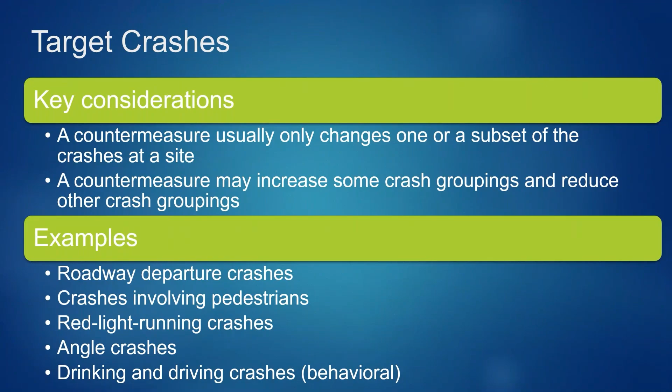Now, selecting a countermeasure, we want to look at a number of factors. First of all, cost effectiveness, because I know last time a number of you indicated that you have a desire to do all of the necessary things to improve safety, but you can't afford to do everything. So we want to come up with some ways that we can really get the most bang for our buck and to reduce those fatalities and serious injuries as much as possible within our budget. So that has to be within the context.

And so you might think about your facilities. Do you have a high-speed facility with limited access? Are you focused more on rural town centers that have a lot of vulnerable users, which would be pedestrians and bikes? Maybe it's a suburban arterial with driveway accesses that causes the most problem. Maybe you have more of an urban central business district type of setting. So the setting that you're in obviously is going to have a big impact on the types of countermeasures that you will select.

Now, when you're selecting those, we definitely want to consider what is the anticipated impact on crashes. We want that reduction to be as large as possible. And then think also about the differences in frequency and severity. There may be locations that have frequent crashes, but they're not that serious. A small fender bender is something that, of course, we want to address, but it might be better for us to really focus on where we have a more serious type of injury or fatalities occurring. So thinking through what exactly do you want to address? Is it the fatality and serious injuries? Are you trying to target all crashes? Can we target all crashes, or do we need to kind of separate that and do what we can?

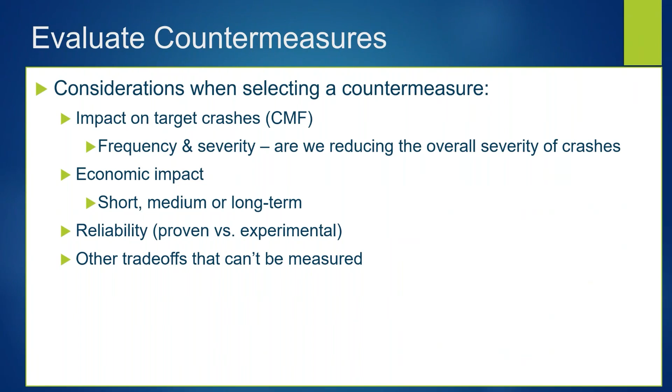Now, Federal Highways has a list of proven safety countermeasures. They started with 9 or so a number of years ago, and they continually added to this list as new countermeasures have been implemented and studies have been done on those. So they've kind of proven their worth and put into context what situations that they're beneficial in. And so Federal Highways does have a page on their website, and they split this out into certain countermeasures that are most appropriate for different types of crashes.

One of the most important ones that we see a lot in rural states is roadway departure or run off the road crashes. And so we'll see some details on enhanced delineation, rumble strips, median barriers, some roadside design ideas, with clear zones and such, safety edge, wider edge lines, and that type of thing.

When we consider intersections, there could be things like backplates with the retroreflective borders, corridor access management, dedicated left and right turn lanes, reduced left turn conflict intersections, roundabouts, that's a big one, yellow change intervals. So lots of things that can be done. And this is a great resource to go to and just look at the ideas.

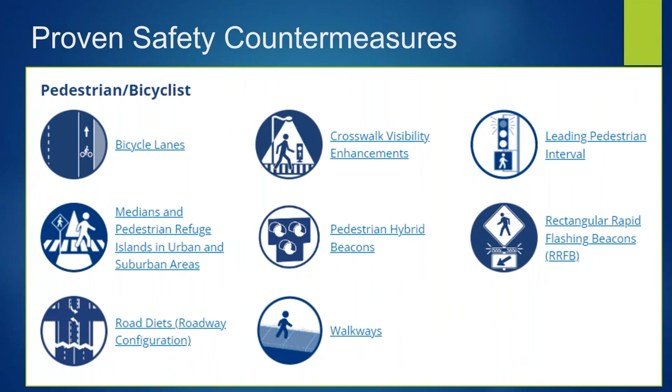It's a bigger toolbox. So not every tool works in every situation, but the more tools we have access to, the more we can make those decisions. And they have a list for pedestrians and bicycles, like bike lanes, visibility, pedestrian refuge islands, walkways, hybrid beacons, and so on. And then there are some that really are cross-cutting, and they are applicable to a number of situations, like lighting, local road safety plans, friction management, safety audits, and then speed management.

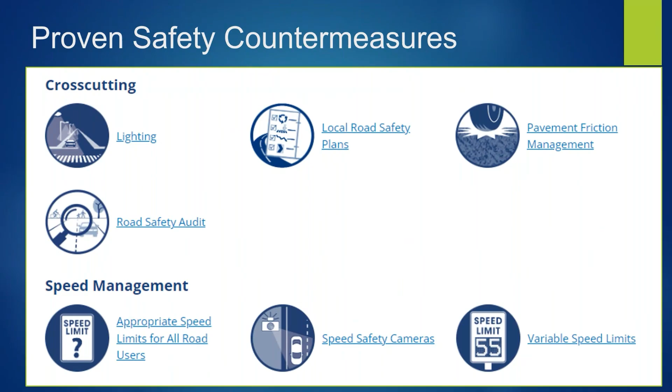That's kind of a big one because we do know that speeding certainly can cause accidents, and in those accidents, the higher speeds tend to result in more serious injuries. Now, in Arkansas, we have a big issue with roadway departure. That's one of our focus areas.

And 74% of fatalities there are kind of broken down into different categories. Like, what else do we know about that? So taking the data, we see that 37% of those fatalities are young drivers, 63% are male drivers, 58% of those accidents happen during daylight, 25% have no seatbelt, 23% speeding. Almost half of those are on weekends. So I think that's very telling in the types of trips that are being made that are involved in these types of crashes. 35% happen during a morning or afternoon commute, and 14% are also at an intersection.

So since we know that that's a big deal, let's talk about some roadway departure strategies. So when a vehicle runs off the road, let's think, first of all, we want to keep that car on the road. So they need to navigate, they need to keep it between the lines. So our first goal will be to think of ways that we can keep the car tracking where it should be. So what safety countermeasures will help us with that? We can increase enforcement, do road safety audits and that type of thing.

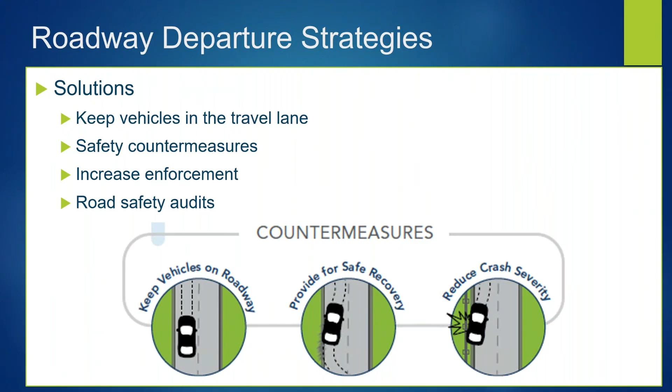But then if we cannot keep those cars on the roadway and they happen to go off on the edge or just slightly outside of that traveled way, can they recover and get back on the roadway? So that's a second strategy. And then if we cannot get them back on the roadway, then what can we do to reduce the severity of the crash? So that'll kind of be our focus in stages.

So roadway departure, nationally, about 51% of fatal crashes are run off the road. That's typically higher in rural states. 27% of those are head-ons, 25% rollover, 19% are trees, or you could put that in context of just a crash with a fixed object. 25% of those are at curves. So we see that that's kind of an overrepresented portion because a curve is a very small portion typically of the overall roadway.

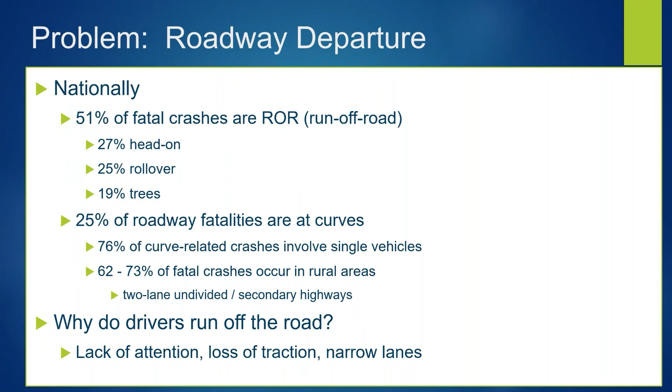76% of curve-related crashes involve single vehicles. So this is not necessarily an interaction with another vehicle, and that changes our perspective on how we think about these countermeasures. And then why do drivers run off the road? We got to kind of get into the mindset of what is causing this to happen. So if you see, of course, in rural areas, we have animals that run out onto the roadway, and that is not something that is an interaction with another vehicle, but certainly changes our attention, reaction times, decision-making skills, and a very short time frame to make those decisions. But drivers can run off the road just from not paying attention, loss of traction, narrow lanes. So we've got a lot of different things that we can pinpoint to try to make this better.

Now, if I know that curves are part of the problem, what if I could take curves out of the equation? Well, that's not realistic. We can't straighten out all the curves, but we might be able to make some changes to alignment. I know that some jurisdictions have a policy that in a horizontal curve having a smaller radius or sharper curve, so to speak, they actually require a little bit more roadway width so that vehicles have a little bit of forgiveness on tracking in that area. It's not really straightening the curve, but it does give you a little bit more roadway width to work with. So those wider lanes at just that sharpest part of the curve can help.

You can add super elevation, and these are things that might be done when you are doing maintenance on the roadway, repaving and that sort of thing. You can make some minor adjustments that will help along these lines. Another thing to look at is the quality of the pavement in those horizontal curves. Again, it is something where it's not just a straightaway, so you have to have that hand-eye coordination and track through there.

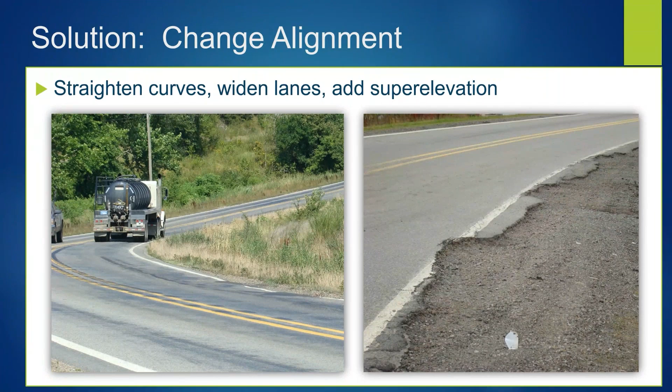So one of our solutions, of course, would be rumble strips or rumble stripes. And this is a series of indentations that are ground into the pavement edge. It creates noise, vibration, so that's something to get the driver's attention. So remember, our first goal was to keep the driver from running off the road in the first place, keep them in the lane. So as soon as they start to leave the lane, that pavement has something there to create that noise and vibration to alert them.

Hey, pay attention. And maybe it was that they looked away for a second. Maybe they're getting drowsy. Maybe they were looking in the rearview mirror at something different. Who knows? But this will get their attention and allow them to make that correction. A lot of the newer vehicles now also have lane assist, and it can vibrate the steering wheel or create a sound that tells you, hey, get back in the lane. So those are good things. But we're looking more at the roadway. What can we do as the roadway agency?

Now, those rumble strips can go at the shoulder. They can go in the center line. And sometimes we have rumble strips in the travel lane. Think about as you're maybe going downhill and coming to a stop sign that might catch drivers by surprise. If you have trouble with folks running a stop sign, you can put transverse rumble strips across the lane to get the driver's attention and alert them to slow down as they approach that stop sign.

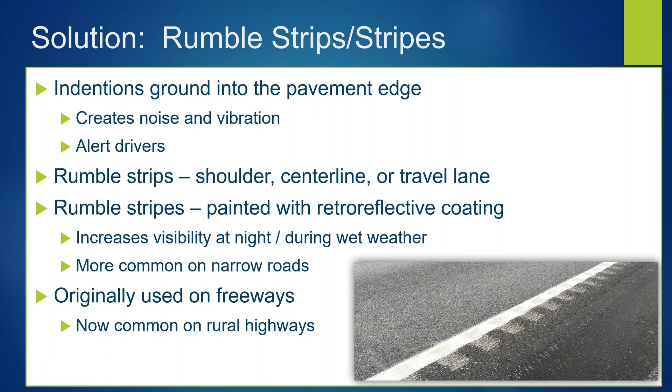Originally these rumble strips and stripes were used on freeways. So it was kind of implemented on the more national scale, the big roads, you might say. But seeing what those benefits are, they're now more common on rural highways, county roads, and other types of roadways.

Now, shoulder rumble strips can be constructed using a number of different methods. The most common is the milled, but they can also be rolled in, they could be raised, and they could be formed, like on a concrete pavement. Most of the time, well, 90+% of roadways in the country are asphalt. So of course, we're going to see these more commonly on asphalt roadways. Now, the milled is the most common because you can go in and form these after you've paved the road. It doesn't have to be done during construction. So it is a safety feature that can be added when the road is already in place.

The rolled type have to be done as the pavement is being placed, so that can only be done during an overlay type project or maybe new pavement construction. There are also the raised, or more of a bump instead of a dip. And that's something that you might see in a warmer climate.

We don't want to do that in the colder climates because when the plows go through to scrape snow off of the roadway, they can peel those off. But in a warmer climate, that can be helpful. Let's say you have a really heavy rainfall and there's so much water on the road that it's getting difficult to see the pavement markings, but you can feel those bumps. And if they are raised and have the reflector, then you might be able to see them a little bit before you hit them. So that's an advantage.

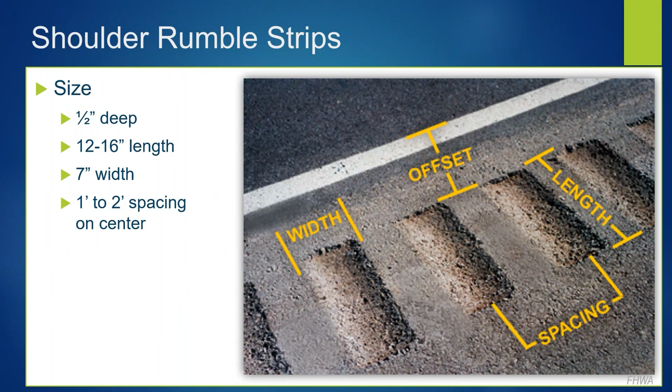Now, early on, there's an obvious benefit, but one of the concerns was if we start grinding into a new pavement surface, is that going to cause that portion of the pavement to deteriorate more quickly? And are we going to have other problems that really create issues that weren't intended? Looking nationally, a lot of the early research does say that there's no evidence of early pavement deterioration. I'm sure all of us can also look at cases and find some place where that's not totally true.

But one of the issues is that when we pave, we place the longitudinal joint at a lane line. A lot of times we do have a joint between the lane and the shoulder. If that is true, and if that joint was not constructed well, and we put rumble strips right on top of that joint, that definitely could be an issue.

Since we're putting depressions in the pavement, water runs downhill, it's going to collect in those low spots. We also know that water and pavements are not friends. So we don't want to have water just standing in those depressions for a long period of time. One idea was to place a fog seal so that after those areas are milled, you spray a fog seal over that to help make it more impermeable to any water damage that might happen. Overall, that was deemed not necessary and also not monetarily beneficial.

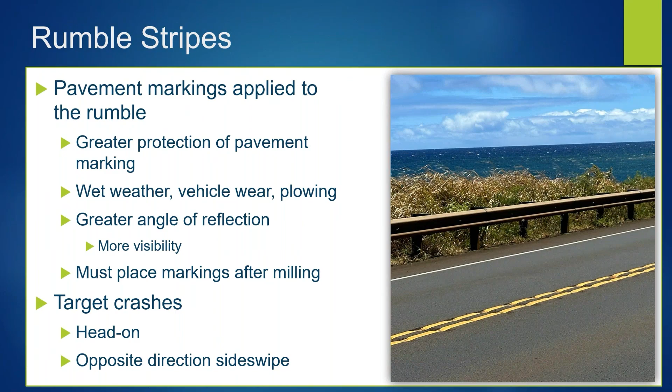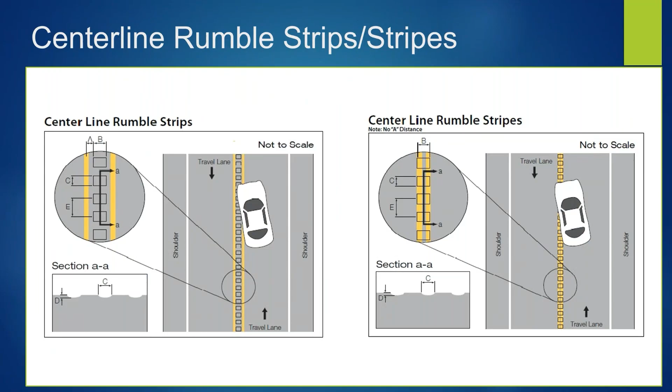Now, how successful is this? We're all pretty familiar with it, I think, but nationally, there's some pretty good evidence that there's a definite reduction for fatal and injury head-on and opposite direction sideswipe type crashes. For the shoulder rumble strips, roadway departure with fatal and injury crashes overall dropped about 36%. We would like it to drop a whole lot more, but that's pretty good. Centerline rumble strips in urban areas have reduced crashes about 64%, and rural areas 44%.

Michigan had a study that they did overall on roadway departure crashes. Their rumble strips and stripes dropped crash numbers 38%. And New York showed roadway departure crashes dropped by almost 80%, which is fantastic. And crossover crashes at the center line dropped about 57%. So those are definitely some convincing numbers that say this is worth the effort.

Now, things to consider. The purpose of rumble strips is to counteract driver error. It's not going to correct a deficiency with the roadway. So let's say that your curve is too sharp for the posted speed limit or the warning recommended speed, or you've got some issues with super elevation, or maybe some skid resistance issues. This is not going to fix that.

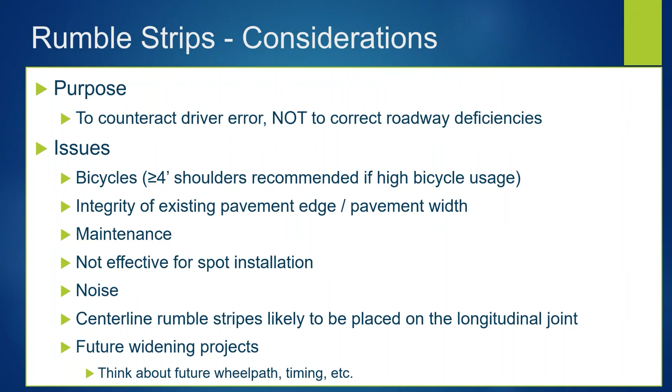For any of these countermeasures, we want to make sure that we can afford to do them, especially for rumble strips, which are not that effective for spot installation, so we have to do a lot of this. In general, it costs anywhere from 10 cents to $1.20 per linear foot, which equates to around $500 to $6,000 per mile. And it depends on a lot of things. I know that's a huge range for cost, so it's hard to budget, but it does depend on the size and the type of the job, the type of pavement.

If you're going to put these on a concrete roadway, it's a little more involved to install them on concrete roadways as opposed to asphalt. And then if this is something that you're bringing in a company to mill in these rumble strips, as like that is the project, as opposed to adding this on to a paving project that you're already doing, that can change the price.

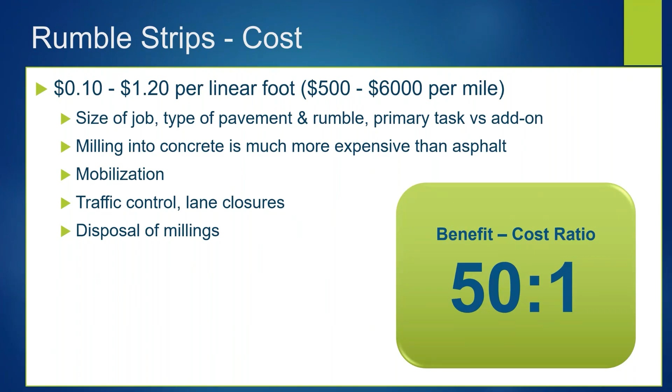Mobilization. If you want to just try it out, this is something that early on a lot of folks struggled with. They wanted to try it but not do it everywhere, because if it didn't work, then that was a problem. But to have a company mobilize to come and do a small project typically costs a lot more per linear foot. And then, of course, think about your traffic control, lane closures, make sure that you dispose of the millings correctly and all of that. But by and large, this treatment shakes out at about a 50-to-1 benefit to cost ratio, which is wonderful. So this is obviously something that's been very helpful and has made an impact on reducing those run off the road crashes.

So it's something that you could implement as a policy, and it could be that you want to have a company come in and place these rumble strips on existing roadways, or you might implement it as a policy that going forward, all newly paved roadways will include rumble strips that meet certain criteria. So a recommended policy by federal highways is that for all freeways and rural highways that have speeds of over 50 miles per hour, this is a good thing to add.

Recommended for rural or urban corridors where significant numbers of roadway departure crashes have been identified, of course. And then centerline rumble strips should be considered for 2-lane undivided rural high-speed roadways. And this is typically where you're going to see a lot of those more serious head-on type collisions. But if you're seeing that in an area, this is definitely a worthwhile solution to look at. And then involve your stakeholders. These will be the neighbors that may not like the noise, but if they're aware that this may help folks from running off the road and crashing into their fence, and they may not have to repair that fence as much, maybe they would be okay with that little bit of extra noise.

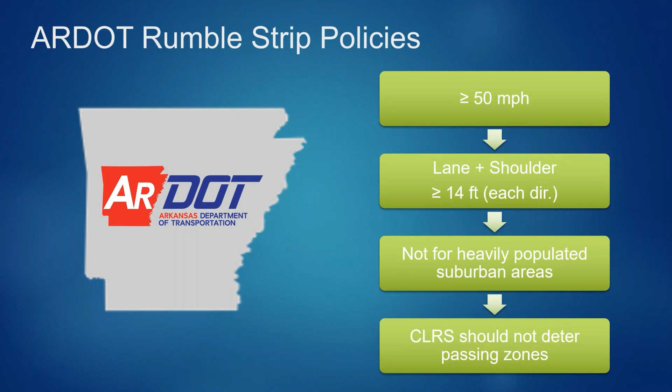All right. So I've got a break right here for us to have questions. Has anything been posted in the questions pod? Yes, we have had one question that's been posted so far. And yes, if you guys do have any questions either now or as we're progressing through here, please feel free to get those posted in the questions pod and we'll get to them at some further stopping points here. The question that I have is, what are mumble strips?

Okay, good question. Mumble strips are very similar to rumble strips, but they have a slightly different shape. It's more of a sinusoidal waveform, so to speak, rather than just a rounded cut for each one of those rumble strips. And that does kind of take the edge off of the sound. So in areas where you feel like you need that, but noise is a sensitive issue, mumble strips are supposed to be a little bit quieter, but still provide that vibration that gets the attention of the driver. So yeah, great question.

Okay, well, I believe that is all that we have at the moment.

All right, very good. So other things that we can do for roadway departure type crashes might be enhanced delineation. Especially in horizontal curves, it's easy to run off the road if you can't see where you're going. If we don't have good signage to alert us that a curve is coming up, maybe those pavement markings are worn out, we don't see those, that can be an issue. So we want to provide information to warn and prepare the driver, make sure the driver is paying attention, and that we can tell them what speed they need to be going to not have issues. And that also helps them pay attention, maybe gives them a little bit of increased visibility, so time to do what they need to do.

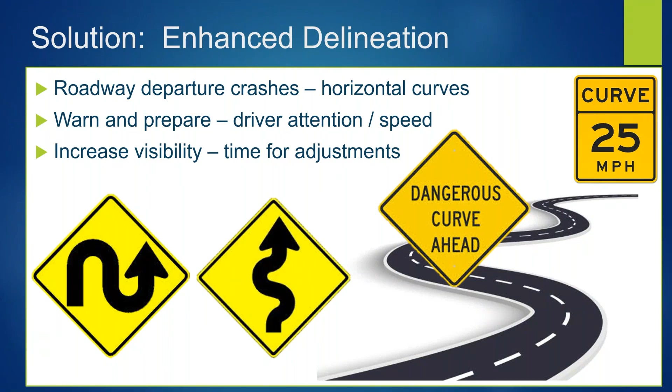The other thing is if you put up a lot of those warning speeds and drivers drive along and see those, maybe it says 45, there's always a teenage boy that says, yeah, but I can do that at 60. And it depends on your vehicle. It depends on the pavement. It depends on a lot of things. But sometimes drivers will look at a speed and say, oh, that's just for big trucks. That's not for me. And so some of those signs do lose their effectiveness if the drivers don't feel like it's serious.

So what else can we do to improve that communication? Well, we can do some things that get extra attention, like a flashing LED curve warning, blinker sign. We can do different fluorescent yellow sheeting. We can use optical speed bars. PennDOT uses a curve advance marking on the pavement surface itself. So again, we're just trying to increase visibility, preview that sight distance. And so the first question will be, what do you have now and what are your current policies?

Are you using maybe speed limit changes in areas that have a lot of curves, like a windy road, or do you keep the same overall speed limit and then use curve warning signs? Do you use more of the orangey yellow or more of the greenish yellow fluorescent? The older style is more of that orangey color, and some of the newer styles have that more fluorescent, kind of a brighter green yellow. And when it's something new, that does get the driver's attention.

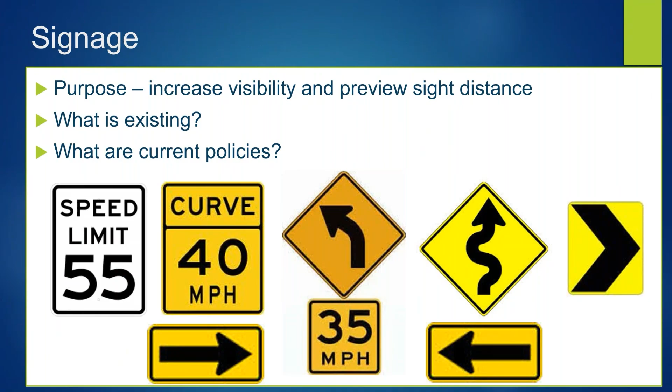If you have a different type of sign, for instance, in this curve, we've got a 90-degree curve, and we have some type of a posted speed limit, but if we know that speeding is prevalent, having a sign with just that straight arrow to the left can mean something a little different than the chevron or sharp curve coming up. You know, it's not just a curve, it's literally a 90-degree turn. So making sure that when we choose our signs, they are very specific to the situation.

Right. Now, also looking at crash rates, roadside characteristics, what are the consequences of running off the road? Is it, you know, kind of a bluff and you're going to fall 60 feet, or you're going to run into the trees, or is it a nice open field where you could kind of correct and be okay? So that will also dictate how serious we need to get with that information.

We can use enhanced delineation. One of the pretty easy things to do is use a wider edge line. We can go to some more durable markings. Sometimes we restripe, but then that paint wears away. And if it's not that visible, then that's something that's going to make it more difficult for drivers. If we need maybe something that's going to work better in snowy conditions or lots of rain. Maybe we have times with different weather where you can't see those pavement markings even if they're new. So we need something maybe that stands up a little higher. So we can do post-mounted delineators that have the reflective badges on those.

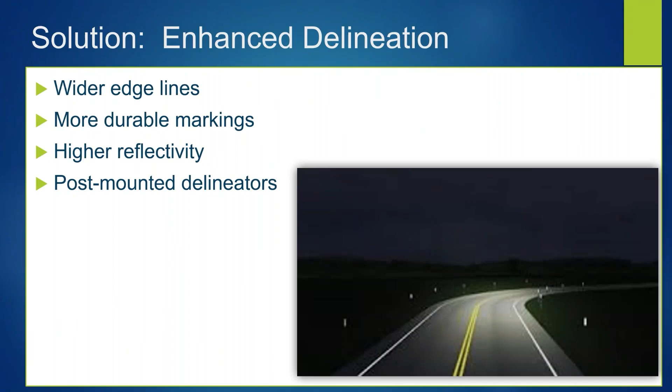Right, the different colors of yellow sheeting that I had mentioned. There's a picture, an older picture from ARDOT, that is changing to the brighter color. In the picture, you can see the older style looks kind of dark. The newer ones are still not the really greenish color, but they are brighter. So making sure that you're getting a good quality sign that has a bright enough color to send that message and be visible to the driver is important.

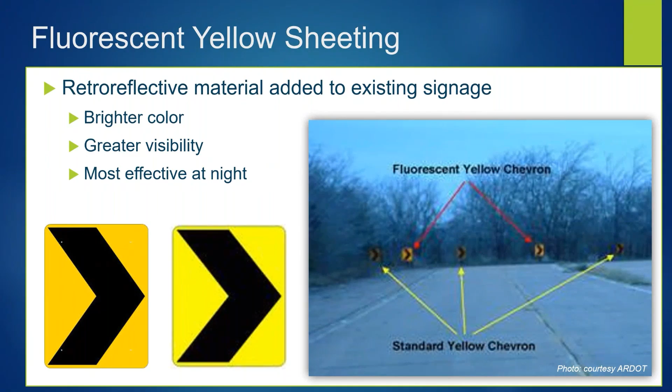Now, maybe you already have signs and you need something that makes them more visible. Adding flashing beacons is going to keep them from blending into the background. Remember, everything that's on a post becomes an object that could be hit during a crash, so make sure to use your breakaway designs. Putting these blinky lights really gets the driver's attention. Again, not something to use a whole lot, or we tune it out. But in certain more dangerous locations based on your crash statistics, this can be really informative.

There is a roadway in Arkansas. When I first started college, driving up the hill to Fayetteville on Highway 71, there was a sign that said it's dangerous and curvy ahead, and then it had a part that told how many fatalities had happened on that roadway within the last year or 2 years. That was a sign that really got my attention. That's kind of scary. You don't see that everywhere. So something that's different will get the driver's attention until that driver uses that roadway over and over and gets used to it. Maybe they don't pay attention. Now, the saving grace is that if they use that roadway quite a lot, they're probably pretty tuned in on how much they need to slow down to navigate that turn.

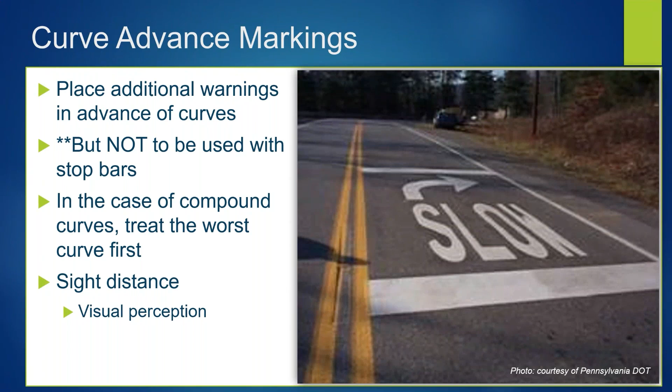And then make sure to think about maintenance. This is a good idea because it should be right in the path of vision for the driver. However, it's also in the wheel path. So over time, these markings do tend to wear away, at least in the wheel paths, pretty quickly. So tire wear is an issue.

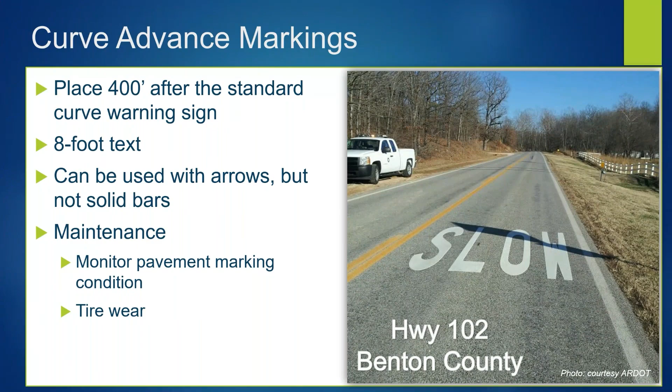If you could somehow space that where it was a little bit less of an implication, that would be helpful, but it does need to be right there in the way of the vision of the driver.

Now, optical speed bars is an interesting one. This kind of gets into a lot of the psychology of the driver and what they're thinking, how they perceive things, and it's kind of fascinating. It's designed so that you see approximately 4 bars per second. And then the spacing, if you think of it like a picket fence, if you're driving down a roadway and there's a picket fence and you see those pickets, and that they kind of have a speed to it as it goes by. But as the spacing narrows between them, now it looks like those picket fence bars are going by faster because they're closer together. And that gives the perception that you're driving faster, which makes you want to slow down.

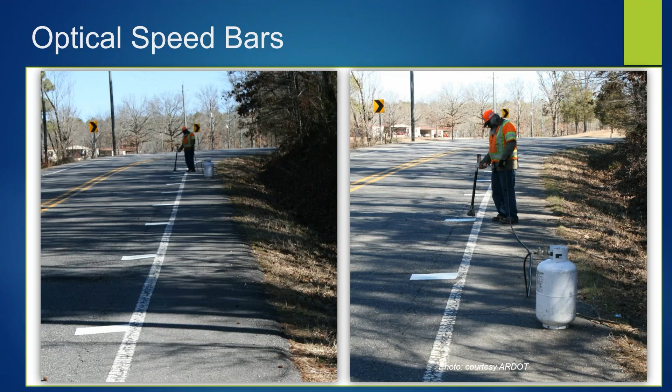One of the issues with that is it's not hugely expensive. It's paint that gets put out on the roadway. However, your crew is in the roadway, so there's a lot of traffic control to consider, and measuring and painting is kind of labor intensive, even though it's not an expensive item. And this is what that looks like. So as you approach the curve and get closer, those speed bars get a little closer together, which is just a visual, hey, you need to slow down.

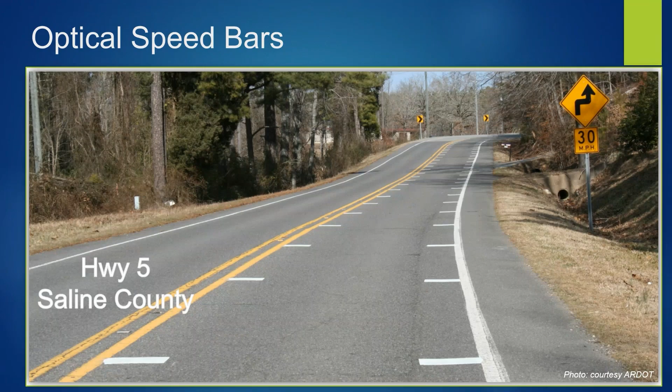All right, what about costs for these items? Signs and paint in general are fairly cheap when you look at it in the grand scheme of things. So consider your initial costs, your maintenance costs. Thermoplastic is definitely more expensive than just your regular paint or latex, but it also may last up to 4 times longer. So given that trade-off and how much time you want your crew spending out on the roadway getting that put in place, that's just a decision that needs to be made. So kind of checks and balances there.

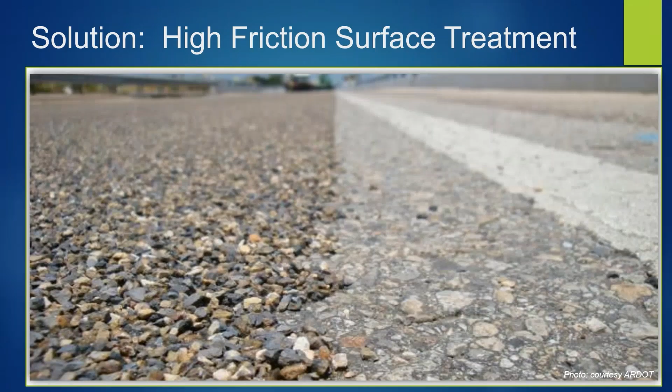All right. Next, we're going to move into high friction surface treatments. This is something that's going to help keep the vehicle on the road by providing some additional skid resistance. So specifically on horizontal curves or areas, maybe a curve leading to a stop sign, those types of things. This is where we might see a greater instance of cars that have to slam on the brake, they end up sliding, and then we have those bad consequences.

Now, horizontal curves only make up about 5% of highway miles, but as we saw earlier, about 25% of fatal crashes happen there. So the percentages are kind of lopsided, indicating that horizontal curves do create issues.

Now, to put in some extra skid resistance, this is something that we do to the roadway itself. We're not really addressing vehicle concerns. You know, if somebody's driving around with old worn out tires, they're not going to have as much grip. So if bald tires on a roadway have a bad outcome, we can improve the roadway. We can't really improve the tires. So we're doing what we can to address what we have control over.

High friction surface treatments depend on high quality aggregates and angular, polish resistant types of materials. And specifically, if you use the formal version of high friction surface treatment, that's going to be a calcined bauxite. That is in conjunction with an epoxy resin. It's an engineered resin that has a polymer type binder, and it's placed kind of like a chip seal, but it's not a chip seal.

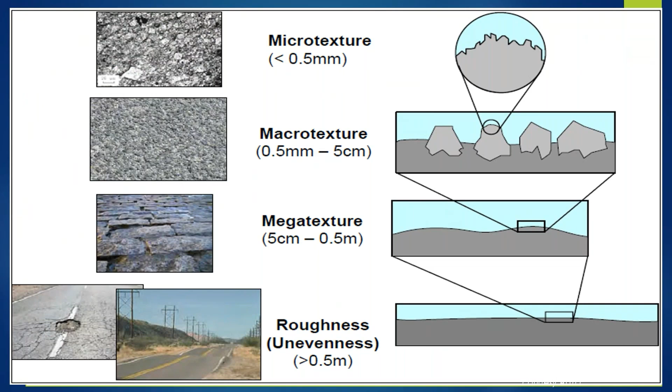Micro is going to be that little bitty stuff, the grit or the rough texture of an aggregate particle that helps grip the rubber on the tires. The macro texture is also important though. That's a little bit larger, so it can kind of grab the tires, but part of what that's doing for us is giving water a pathway to move and hopefully run off the roadway without interfering in that and making a barrier between the surface and the tires.

HFST, that's our high friction surface treatment aggregate. We mentioned the calcined bauxite. Bauxite is actually only available in 3 states in the country. That's Arkansas, which is here, Alabama, and Georgia. Calcined bauxite typically, though, is brought in from overseas. China, India, and Australia all do that.

So basically taking a bauxite material and baking it in an oven. That's the calcined. It heats it up. And we want that to be fairly small in size. So 1 to 3 millimeters, or about 1/8 of an inch. That's the size that we're talking about. So not only do we get some of that macro texture, but we're adding a lot of micro texture.

In terms of construction, we can apply this over asphalt pavements. You can put it on concrete, but most of the time we see it on asphalt. Application rate has to be designed for that epoxy resin. So we're putting down that resin first and spraying this material, can broom across, and that's basically the glue. We put the glue down on the existing pavement, and then we sprinkle this very, very textured, very hard, very durable aggregate on top.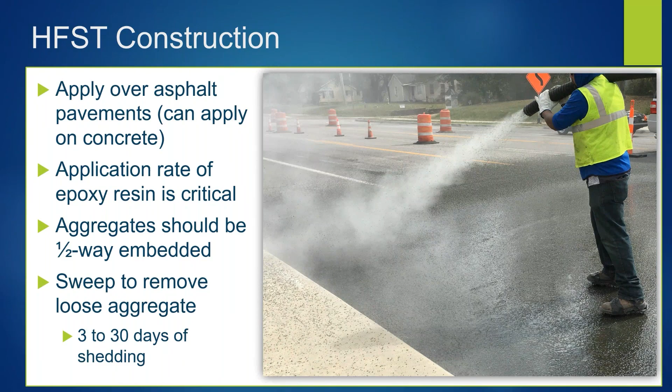We want that aggregate to get about halfway embedded in the glue, and then we're going to sweep off what's left over. So in that context, you can see why it's placed in a similar manner as chip seal. It will tend to shed for up to a month, but then we are left with a surface that's got a lot more surface texture.

Now this can be done manually, or it can be a mechanical installation. The manual installation is a lot cheaper. So unless you have a lot of locations where you want to place this, it's usually economically more beneficial to place by hand. And so you have the truck with the epoxy, you go place that and try to get that all spread out. Keep in mind you do need the little raised, I don't know, fancy construction golf shoes is what I call them. I'm sure they have a much more technical name, but the risers on the shoes, because your feet will stick to this stuff.

You can usually put down about 200 or 300 square yards per hour manually. Mechanically, you can do a whole lot more than that, so 1,500 to 2,000 square yards per hour. You do need to remove any existing thermoplastic pavement markings so that we get a good bond. And then make sure it's applied in clean, dry conditions with a minimum temperature of about 50 degrees. So this is more of a spring and summer type of activity.

Now the cost, it is kind of expensive, particularly if it's a mechanical installation. Anywhere from $25 to $35 per square yard. The aggregate is expensive, but also the binder is expensive. So when we improve the quality, we're improving quality of both components. If you're used to, say, a chip seal, it's got aggregate and it's got the emulsion. Those are both relatively cheap factors, but we took both of those and really ramped up the quality, which is also going to ramp up the price.

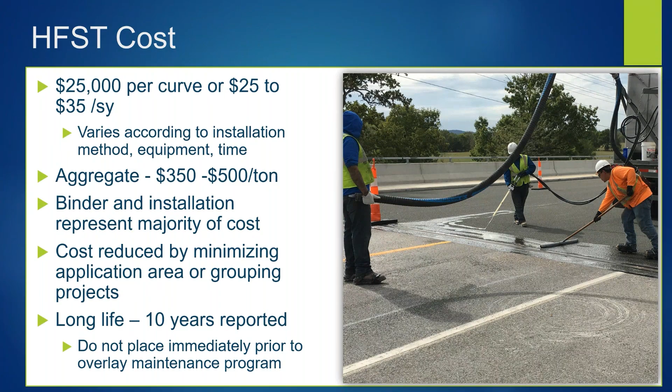And then it does tend to last quite a long time. 10 years has been reported. Sometimes the high friction surface treatment has lasted longer than the asphalt that's around it. But it's not something that you want to spend a lot of money on when you're going to do an overlay program or some kind of a rehabilitation project and it gets covered up. So make sure and think through that.

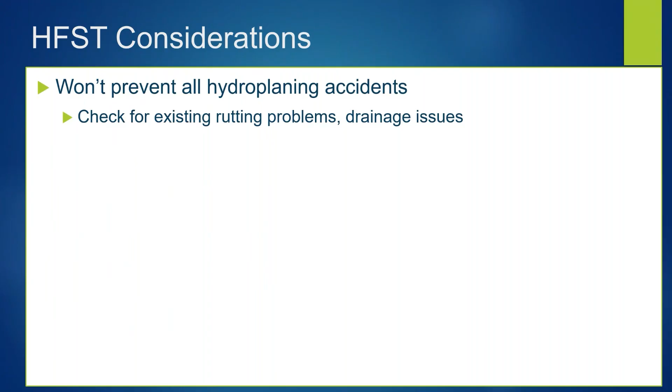Now, this does not prevent all hydroplaning accidents. It's definitely going to help, but it's not a magic fix for hydroplaning. If you have contact between the surface and the tire, it's going to give more of a bond there. But if you have too much water to have that connection, it's really not going to fix that. So make sure that you correct any rutting problems or drainage issues before you put this treatment down.

It's pretty good to withstand the winter weather, snow plows and that kind of thing, but it's also using a very, very hard aggregate, which can actually be hard on your equipment, on the blade. So it is too rough for a rubber tip plow blade and will tend to tear those up.

Now, sometimes this will get placed and there will be some shedding, and especially under a manual installation, some areas get done better than others. And if that coverage gets kind of spotty, it may look bad, but any of that material that is still glued down on the surface is still serving its purpose. So as long as you have some in the wheel paths, it really should still continue to perform. It's just not going to be pretty.

Now, one of the issues with this is that this does not increase driver comfort. What I mean by that is some of the things we do to increase safety. Maybe we make the lanes wider, or we make the curve have a larger radius so the curve's not so sharp. That makes the driver feel more confident, which then also allows the speed to increase. They feel like, oh, I can go faster here. It's not going to be an issue. But we're not doing anything here. We're not adding superelevation. We're not straightening anything out. We're not doing anything different. So it doesn't make the driver feel like their vehicle will perform better. And so that's actually a good thing.

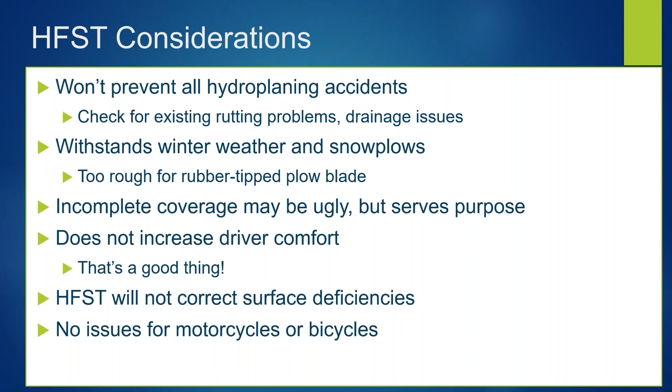So just something to think about. Usually it's reported to not be an issue for a motorcycle or a bicycle. However, if they do have an accident, I've heard people say the road rash is unbelievable. So hopefully it's enough traction that that doesn't happen, but it would be much more rough on a person that did have an accident.

Now, in terms of successes, Pennsylvania did a lot of work with these, and in their early work, 100% reduction in all types of crashes. So this is pretty amazing. Kentucky was reporting around 85% reduction in crashes in wet weather. South Carolina reported 57% reduction, 24-to-1 benefit to cost ratio.

And then a national study was done on these specific to intersection crashes. And of course, intersection crashes can be due to a number of things, but 20% reduction happened when the high friction surface treatment was placed. The other important piece here is that there have been no reported increases in crashes after the high friction surface treatment was installed.

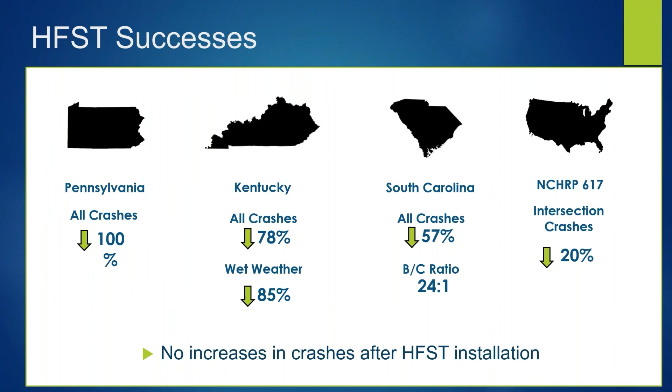All right, so all these things have been a way to get the driver's attention, keep the driver on the road. But what if they run off the road? Then what? What if we still have not succeeded? Now we need to look at how to reduce the consequences of running off the road.

So one thing we can do is look at the lateral clear distance. Where are the trees? Where can we do things to improve visibility, have fewer obstructions? An obstruction can reduce visibility, but it can also be something that becomes a fixed object in a crash. Are there things that we can do to the ditch? Maybe reduce the slopes on the roadside and ditch slopes. That can help prevent rollover accidents. So maybe they still run off the road, but if the ditch was more shallow, the car wouldn't roll over. Maybe it would just be a property damage only type of accident rather than a minor or major injury or worse.

Also consider the direction of vehicles. When they are driving through, if they run off the road, consequences in one direction will typically be worse than in another direction. So you might need to do something different on one lane of the roadway than the other. And then try to remove or relocate any objects in hazardous locations.

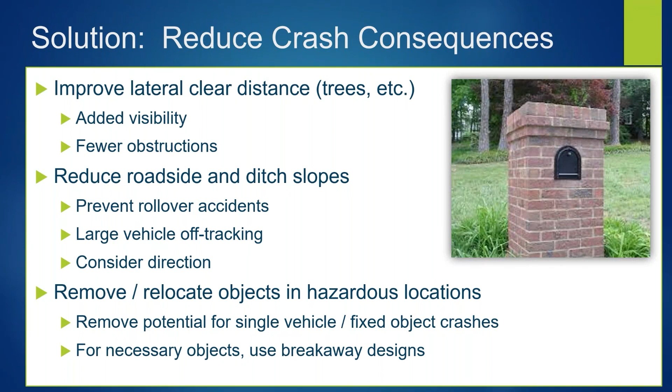But anything that you can do to get things like that moved a little further back off of the roadway, and the mailman doesn't like it because they have to pull into a different area. But think about anything in that general vicinity of the roadway is a fixed object that could become an object in a crash. And try to use the breakaway designs. It's better to save a life than to have a pretty mailbox.

All right, I think I have 2 slides out of order. So the next solution is the safety edge. And this is something that's designed specifically to reduce the pavement edge drop off. It can help reduce crash severity. It's not really going to keep you from running off the road, but it can help.

Because what happens is when we kind of just barely run off the road and one tire drops down off of the edge of the roadway? Well, if that's a vertical drop off of more than about 2 inches, if you're going 55 miles an hour, it's nearly impossible to get back up on the roadway without overcorrecting and getting yourself thrown into oncoming traffic. So that tire scrub is a big deal.

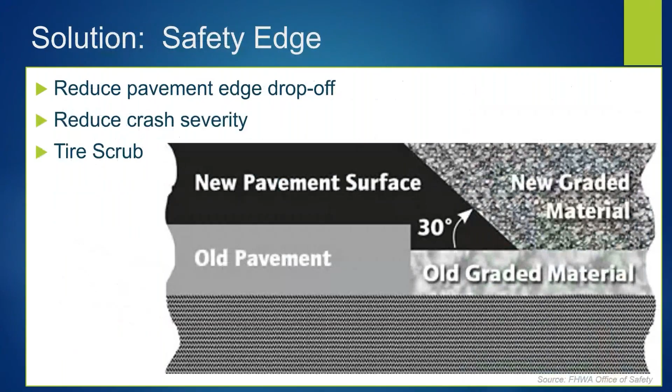Let's go back here. I don't know why that slide is where it is, so I'll just skip that for now and hope that works itself out. But crashes on roadways with drop-offs are 4 times more likely to be fatal. So if we have a nice paved shoulder, this is not an issue. If we don't have a paved shoulder, we usually have an aggregate shoulder. So we pull up that material and it looks like it's all nice and pretty solid, but over time, that's going to wear away. So when we don't have a paved shoulder and that roadway gets a little bit older, we tend to see these types of drop-offs.

When you pave normally, at the edge of the screed, we have what's kind of a vertical shape, it gets mashed down and has a little bit of a wavy shape there. But in general, it's kind of a vertical shape. But if we could change that so that we're not going to expose a vertical drop-off and maybe make that more of a sloped edge, then I'm going to be able to have something there that will allow drivers to correct and get back onto the traveled way without accidentally throwing themselves into the other lane.

With Safety Edge, they advertise that up to a 5-inch drop-off can be traversed and get a car safely returned to the traveled way without an accident. And that's a big drop-off.

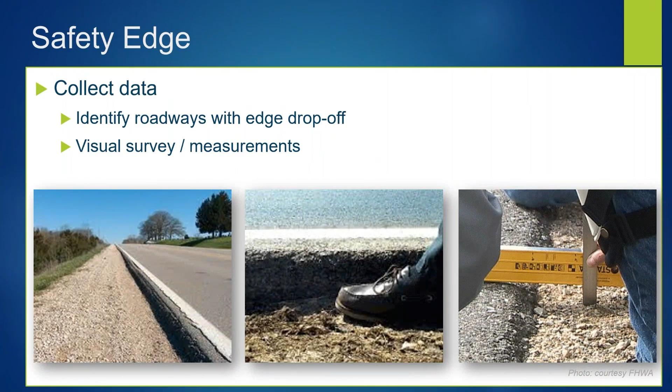So to use safety edge, first of all, you've got to figure out where this is. You've got maintenance personnel that can probably tell you where a lot of these drop-offs are already. The mailman, the trash man, all of these trucks that travel the edges of the roadway and stop routinely, they probably know where all of these drop-offs are. But collecting data is pretty straightforward. Just go around, identify the roadways with that edge drop-off, and with those visual surveys and measurements, you can get a lot of data pretty quickly.

Now I'm going to try to roll back here to this picture. Now, the safety edge is one of the Federal Highway's proven safety measures, and it's really just a fixture that goes onto the edge of the paver, at the edge of the screed, where instead of that vertical end gate, you've got a fixture that bolts on and forms a 30-degree angle. So as the paver goes by, it's forming an asphalt wedge at a 30-degree angle, and you don't have that vertical drop-off. And you still pull up your graded material up to the edge of that, just like you would on anything else. But when you don't have a paved shoulder, this is kind of giving you a little bit of a paved shoulder, if you want to think of it that way.

Now, it's a pretty easy installation. You buy the fixture, and it's just 2 or 3 bolt holes. There are a couple of models of European pavers that you may have to cut a hole to have it bolt on. Most of them bolt on very readily, especially if it's a US-made paver. They are removable, and you can also attach it over to the other side to flip it around and use it on the other edge. So depending on which side you're on, which lane you're paving, what direction, it's pretty versatile and helps out.

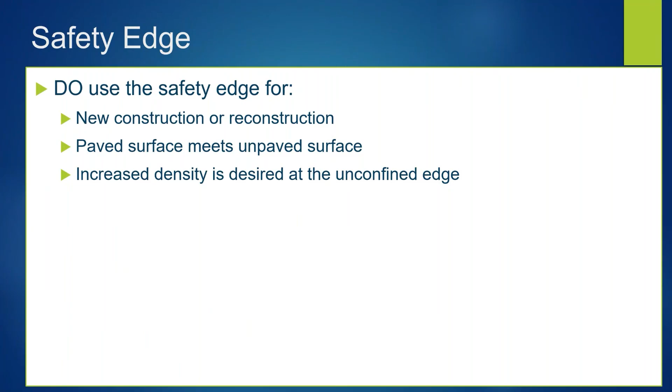All right, so when to not use the safety edge and when to use the safety edge. So if we have new construction, that's an obvious, pretty easy one. If we have reconstruction, if you have anywhere that a paved surface meets an unpaved surface, that's something that we want to do. But this is happening, it is attached to the pavers. Obviously, it has to be at a point where we are paving, so it's not something that you can just go add on. You would not run a paver down and try to attach this little asphalt wedge to something that's existing. It does have to be during a construction project. So policy-wise, this is something that you could implement for all new and rehabilitated types of pavements.

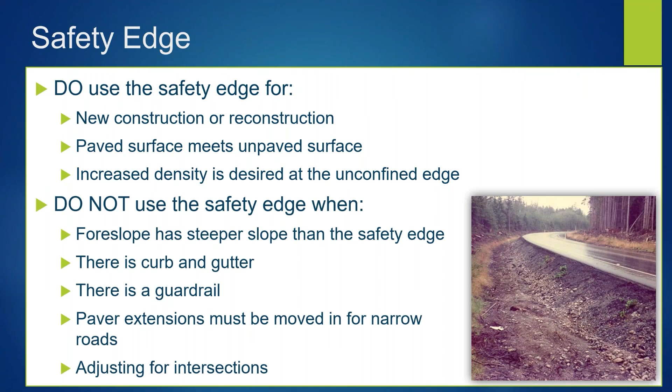Times that you don't want to use the safety edge is when you have a steep slope to your ditch, maybe you're off the edge of the roadway, that's steeper than the safety edge would give you. That's not going to work out well. Obviously, you don't want to do this when there's already curb and gutter or a guardrail. And then remember that your paver extensions have to be moved in for narrow roadways, and just make sure the safety edge fixture will fit within the edges of your screed for that. And then you may need to adjust for intersections, of course.

In general, your safety edge should be invisible. When you're finished and you pull your graded material up on the sides, nobody's ever going to see that safety edge unless you lose your aggregate shoulder. When that falls away, you might see it. But the point is that it's there and it's going to help support that vehicle. But it's not intended to be a substitute for your graded shoulder.

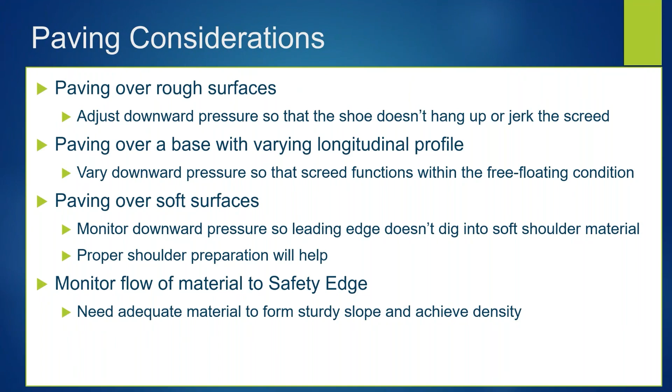You don't have to do anything special or extra as far as compacting the wedge. That was one of the thoughts at one time, that maybe we need a tag-along roller to help mash that in. That has not been considered necessary, but make sure that you have enough material that's being compressed into that wedge that you do get a decent density so that it works right. Use your standard rolling pattern.

One thing that can happen is that the edge will kind of stand up. So if you think of that 30-degree wedge, but then when you get on the pavement with the roller, if you have a lot of further consolidation, you might have this shape before you roll it, and then it might squish and kind of push the top surface of it out toward the edge. And if that's happening, you don't have 30 degrees anymore. You have something that's closer to vertical. So flatten out that slope a little bit if necessary, and then monitor that. Make sure and watch it during construction that you're getting that 30-degree slope that you want.

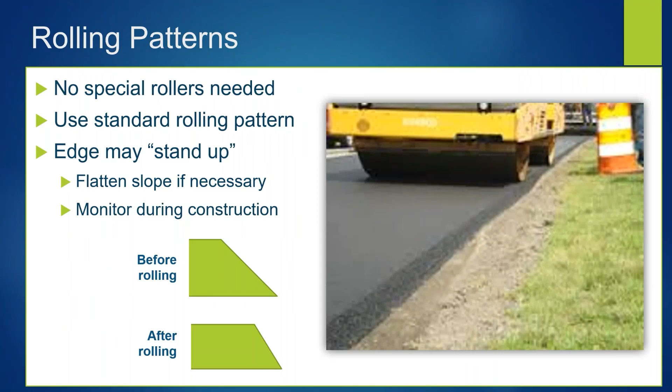Now, what does it cost to do this? Relatively cheap from the aspect that you buy this thing one time, you can attach it to your paver and use it on as many projects as you want to. Somewhere in the neighborhood of $5,000, maybe a little more depending on the type. Some of the companies that sell this, Transtech sells the shoulder wedge maker, Advant-Edge Paving Equipment sells the Ramp Champ, Troxler sells the Safe Slope. These are all kind of the same thing.

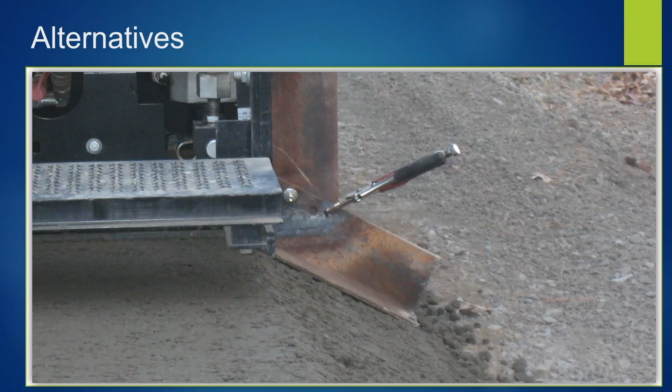All right, so that is all on Safety Edge. Do we have any questions that have come in? Okay, it does look like we've had a couple come in.

One, it says, can a notched wedge joint maker be used for this? A notched wedge joint maker is typically for paving projects where you're forming a longitudinal joint, and it's got about a 1-inch notch, and then the slope part goes out at a 1 to 12. So it's much flatter than what you see for the safety edge.

I know there are some similar things that are adjustable, but I don't know of any that are adjustable enough to get you up to that 30% or that 30-degree slope. So I'm not sure that those can be used interchangeably.

Also, the fact that it puts that notch in there. So for a 2-inch overlay, you've got 1 inch of notch, and then that 1 to 12 slope means that the other inch is actually spread out over a 12-inch width. That would be a lot wider than what we would normally have as excess space available during a paving project for safety edge. If you just built it that way and left that as your shoulder, that's actually flatter. I don't think it's a problem, but monetarily, we typically are not set up to have that amount of real estate available to do a slope that flat.

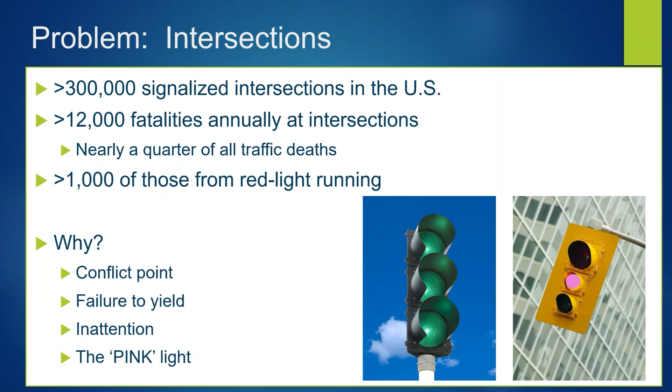So one of the solutions here is roundabouts. It's a circular intersection and it has a center island. There are no traffic signals, no stop signs, and they've been reported to increase traffic capacity by 30 to 50% compared to traditional intersections. So I've got a poll question that I want to pop up here for you. Give me just a second to load that. All right, that should show up on your screen now.

How are roundabouts viewed in your jurisdiction? Everyone loves them. Drivers do well with them. Drivers maybe just tolerate them, or you might have mixed reviews, or you get lots of complaints.

Give me a couple more seconds to finish answering that.

All right, very good. It looks like most of you have mixed reviews, and we've got a few where the drivers simply tolerate them and a few that they feel like drivers do really well. Nobody said that they get lots of complaints, so that is encouraging.

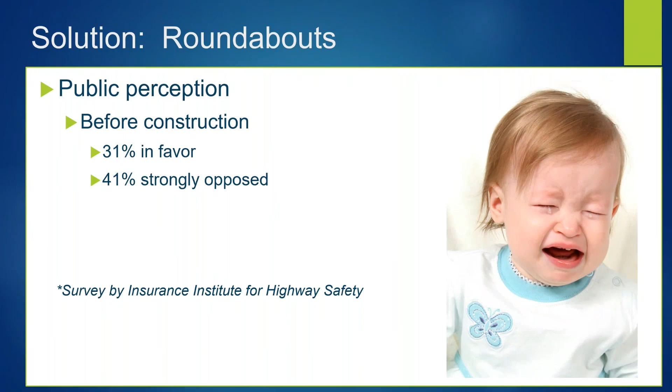So let's look at some of the characteristics of these. It is, again, a circular intersection, and traffic goes counterclockwise. So you enter the circle and you have to yield to those who are already circulating within that roundabout. So there are yield signs at all of the entry points. But keep in mind, it's a yield sign, not a stop sign.

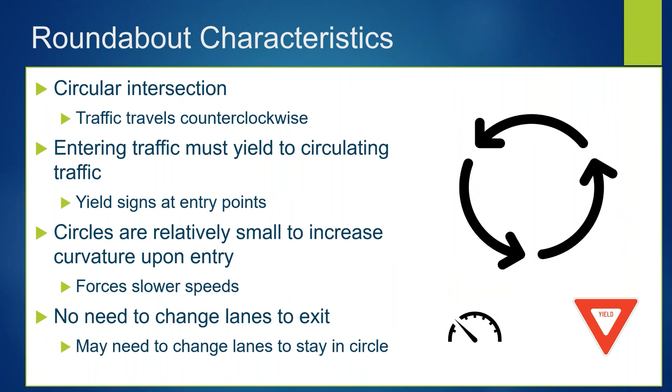The circles are typically pretty small, and that is a specific design to help increase curvature and force slower speeds upon entering that circle. And then if it is designed correctly, you should never have to change lanes while you're in the circle to get out of the circle. Okay, so you may have to change lanes if you miss your turn and need to stay in the circle, but overall, if you get in the right lane as you enter the roundabout, that should direct you exactly where you need to go without an issue.

Now, part of the reason I blame Chevy Chase for the European Vacation movie where they get stuck in the traffic circle over in Europe, and it just seems like a horrible, scary thing. But a roundabout is not the same thing as a traffic circle. On the roundabout, the cars going into the circle have to yield. In a traffic circle, the entering vehicles have the right of way, and those already in the circle have to adjust. And that means they get overloaded with too much traffic and things kind of grind to a halt. So they don't function as well.

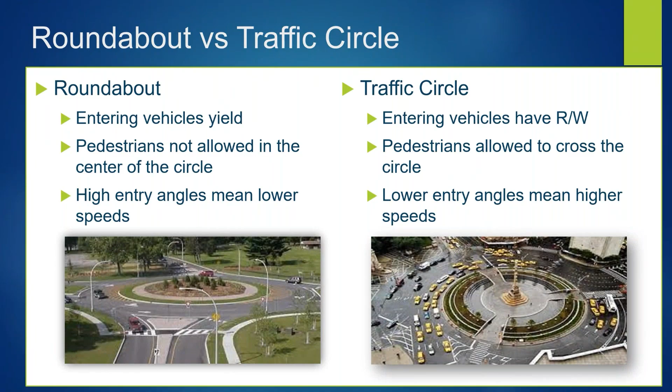In terms of pedestrians, a roundabout is not intended to have any pedestrians in the center portion of the circle, but in a traffic circle, pedestrians can cross into the center. And then for a roundabout, we have higher angles of entry, which means cars are forced to slow down before they enter the circle. And traffic circles have those lower entry angles, so cars go faster as they come in. The faster they move, the more often they make mistakes.

A single lane roundabout looks something like this, and you can see on the entry areas to that circle, we've got a splitter island, and that separates the traffic going into the circle as opposed to that coming out. So we've got a little bit of distance separation there. And then also we design that curvature to deflect and slow down the vehicles that are coming in. And that splitter island does that as well as allow pedestrians to cross in two phases.

So if you look here, pedestrians, again, do not go to the center of the circle. They're going to cross a leg of the intersection back here before the circle. So in theory, the pedestrian only has to watch one side of traffic at a time. They get halfway across, and then they have a place to stand and then consider the traffic exiting the roundabout before they make the decision to cross on over to the other side of the roadway. So splitting up those decisions tends to help make better decisions.

And then there is an apron also. This is a traversable portion of that center island, because one of the things with our single lane roundabouts is sometimes they're small. So imagine that you had this single lane roundabout close to a school, and the school buses come out. Those are big vehicles, and we might need them to have a little bit extra room to make that turn. So we do typically have a traversable section and then a portion that is not traversable, or not intended to be anyway.

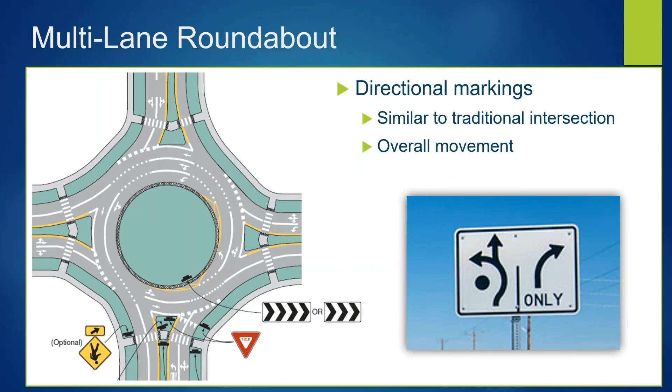And at this conference, they talked a lot about the roundabouts and how safe they were, like a 98, 99% reduction in serious and fatality type crashes. And so what I'm hearing is that they're so much safer. But looking at all of the cars in the roundabout, every one of them had skid marks on the side. So lots of side swipe crashes. The difference is a side swipe type crash is property damage only. An angled crash at a traditional intersection involves typically some serious injuries and fatalities. So we're talking about that reduction. Yes, it's a huge reduction in the very serious type of accidents. That doesn't mean there won't be some accidents, but we want to reduce that severity level, so that's good.

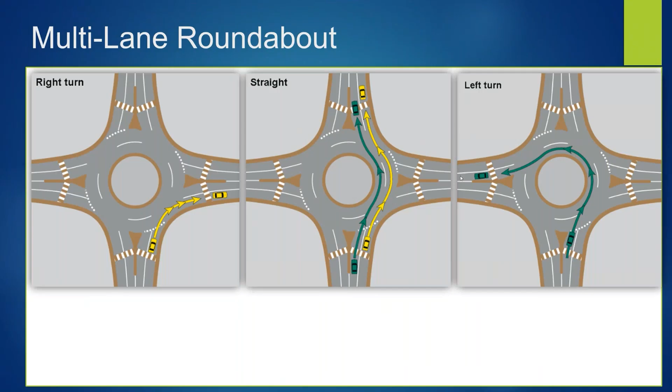We have the ability to accommodate left turns. So instead of having a right turn lane, a through lane, or 2 through lanes, and a left turn lane, we're accommodating all those movements with the same 2 lanes of traffic. But the green car makes a left turn, goes around the roundabout, and comes out in the left lane on that 3rd leg. And then the additional piece here is that we are able to accommodate U-turns in the same system. So a lot of our 4-leg intersections do not allow for U-turns.

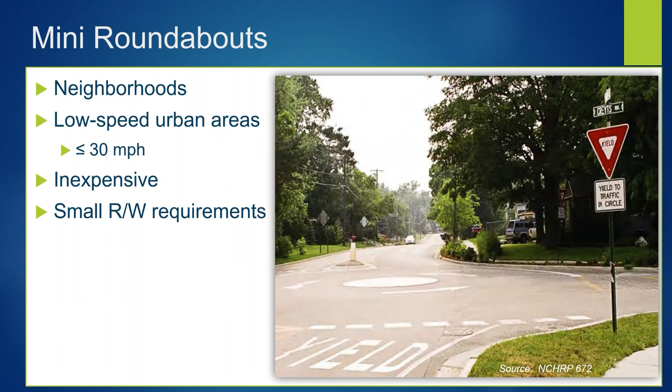There are also miniature roundabouts or mini roundabouts, and these are handy sometimes in neighborhoods where you have low speeds, something less than 30 miles an hour. They're not very expensive. They don't take a lot of right-of-way. However, because they are small, they have to be completely traversable. So this little center island, there are some pavement markings that tell us what to do, but a lot of folks will drive straight across. But if I brought a moving truck in here, I do have to have that traversable nature so that the moving truck can fit through. So sometimes those work well, and sometimes drivers don't quite do what they're supposed to do.

Now, driver decisions. What do you have to do when you approach a roundabout? Well, first of all, you have to figure out which direction or which leg of this intersection do I want to end up in, and then pick the appropriate lane. So that means I've got to have some signage on the approach to make this critical decision in advance, enough that I can get myself in the correct lane. If it's a single lane roundabout, you don't really have that decision. But then also make sure your drivers know that they have to yield to those who have right of way. So the ones who are already in the circle have priority.

They also have to yield to pedestrians that are crossing at the entry. And hopefully the way that you enter a roundabout, you're seeing that pedestrian and they're only having to cross one leg at a time. So they should also see you. One downside on the pedestrian aspect is that a driver coming into a roundabout may not be looking to their right where a pedestrian would approach. They're probably looking to their left to see who's coming around that circle, to see who they have to yield to. So you need to make sure that there's plenty of visibility for pedestrians that are entering that area.

The other decisions that have to be made is to figure out when there's enough of a gap to get into the circle, and then again watching for pedestrians, and that's at the exit. All right, so decision wise, I would say that a traditional signalized intersection is a little bit simpler because you don't decide anything. You just have to do what the light says. You may decide whether or not to obey the light, but the light tells you exactly what to do.

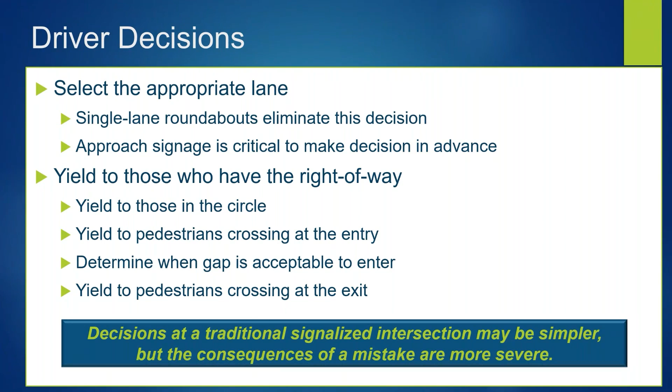It tells pedestrians when to walk. It tells you when to make a left turn, when you can go through, and that sort of thing. The problem with that, even though it's simpler, if it doesn't work out quite like it was supposed to, the consequences of a mistake are much more severe.

Pretty difficult for the big moving trucks though, and sometimes they'll just take a normal left turn and cut right across in front of the roundabout instead of making the circle. Right, so user education is very beneficial.

And overall, I would recommend, and this is probably on a slide somewhere coming up, but when you decide to implement roundabouts and they're brand new for your jurisdiction, start small. Start with a one-lane roundabout. Let folks learn that, and then move to your multi-lane roundabouts. I think they're pretty common now. We don't have as much of an education issue, but if it is kind of a foreign concept, introduce that slowly and try to encourage that user education.

Now, advantages of roundabouts: minimal conflicts. Everyone is traveling essentially in the same direction. So you don't have those right angle conflicts. You don't have left turn conflicts. Everyone's kind of moving in the same route. Your speed control is provided by geometrics. You're not depending on vehicles to see a speed limit sign or a traffic control device to tell them how fast to go. That's what it takes to make it through the roundabout.

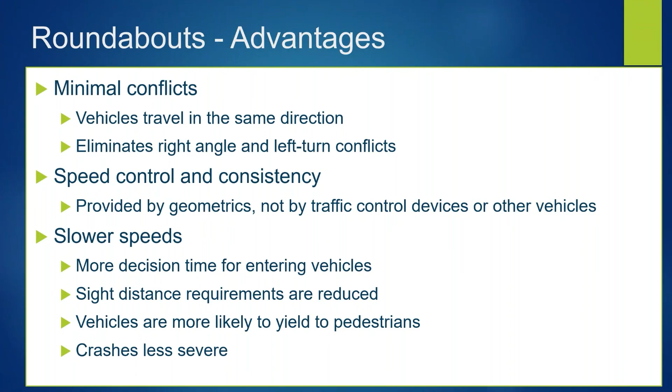So when you force those slower speeds, you're allowing for more decision time for the vehicles that are coming into the roundabout. You have smaller sight distance requirements because you're just looking at merging in with those other folks that are already there, the ones that are pretty close to you already. Vehicles are slowing down and a lot of times more likely to yield to pedestrians. And of course, the crashes being less severe is a huge advantage. Overall, the delay for a given vehicle is lower. You may have to slow down, but you don't necessarily have to stop. When you don't have to stop, that increases some environmental benefits because you're not idling as much waiting at an intersection.

Now, there's no priority given to certain movements. So some of our intersections, we have the major and the minor approach. The major approach typically gets priority for a lot of the design of that signal timing, but all of the intersection approaches are treated equally. Now, this could be an issue when you have a major arterial intersecting with a low volume minor street. There may not be enough gaps for that minor street vehicle to get into the circle. But in general, treating those all equally means that the side street folks are not always having to wait on a red light to turn to green to have a chance to get in there.

So overall, it makes the intersection more efficient because it reduces the need for turn lane lengths, so you don't have as much pavement. All of those actions that are happening are a little bit more coordinated instead of you, then you, then you, the taking turns. And again, that advantage with the U-turns. It can be traffic calming because people tend to get a little agitated if they have to sit at a red light too long. It helps transition from a high-speed rural to a low-speed urban environment, and the driver feels like they're in control much more so than being controlled by signals. So I think that can be a huge advantage.

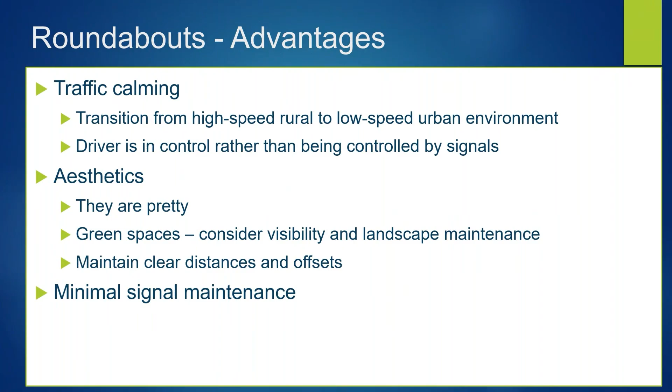And it's surprising how often that happens. So make sure that if you're going to put an obstruction in the middle, make sure that everyone can tell that there is something in the way. And then from a maintenance standpoint, if you don't have a traffic signal, you don't have to maintain a traffic signal. And that is nice.

Now, visibility. These are some of the challenges of roundabouts. Sometimes drivers cannot see the exit point, especially if it's not really a four-leg intersection. Maybe it's a 3 or a 5. So things get a little bit turned around when the drivers start going in a circle. It's helpful to see where's my exit point and is there some sort of a landmark, even if it's just a tree or something off in the distance that you can tell when you get to the place to get out. Driving in a circle can disorient older drivers in particular.

Also, older drivers sometimes struggle with peripheral vision or being able to turn their head back to look over their shoulder for vehicles that are already in the circle. So if your entry curvature is too sharp, yes, it will slow the speed down, but then that driver has to look back over their shoulder to see who's coming. So make sure that you balance those benefits.

In terms of safety, there can be an increased risk of crash with fixed objects, especially if you've got decorative things in the middle of the circle. It does take away your ability to have signal progression because there are no signals. So you don't have those platoons of vehicles that are moving down a pathway. And that means if you're in a driveway over at some business on the side, in the normal system, you would say, well, when the light turns red, that'll catch all of those folks and I'll be able to turn out. Well, if you don't have a signal, you kind of lose that grouping of traffic. And so your side streets can actually have more difficulty, especially if they are between the major intersections.

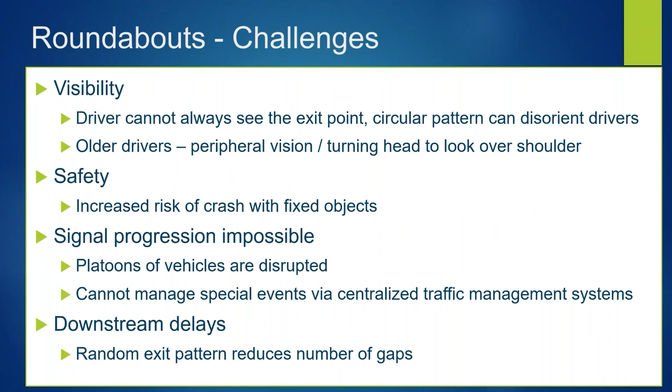It's also much harder to manage special events. So when we have a Razorback football game, all the signals are disabled and we've got emergency personnel directing traffic, trying to get them out of town and on their way back home. If you don't have signals, some of that could be done with signals, but if there are no signals, you can't do it. So you have to definitely depend on personnel to help manage those traffic patterns. And then again, that random exit pattern can reduce the number of gaps downstream from the intersection. And again, the folks on the side street may have some trouble finding some gaps, especially during higher traffic times.

The spatial requirements for roundabouts can be a challenge, especially in some downtown areas. If you have room for a circle, you can definitely save on the approaches. You don't need as many lanes coming into the circle, but at the circle itself, you are going to take up some of the corners, so to speak. So if there are businesses, maybe there's a church on one corner and a bank on the other corner, and you decide that's a great spot for a roundabout, make sure that you can fit the geometrics in there, and also think about utilities. So how much right of way do you have available to form that circle, and make sure that the circle is large enough to handle the traffic.

If you have a multi-lane roundabout, there are a few more decisions to be made. Again, if you're in the correct lane, then you should not have to change lanes while you're in the circle. But if there are multi-lanes, then maybe you got in the wrong lane and you do actually try to move over, or maybe other people are moving, or you're just worried because you don't know if that guy knows what they're doing. But it can be a little bit more complex regarding those decisions. Pedestrians may have a greater distance to cross, which could impact some of the timing. Think about the elderly and the children who may walk a little bit slower. If you have visually impaired pedestrians, make sure that that's not going to be an issue.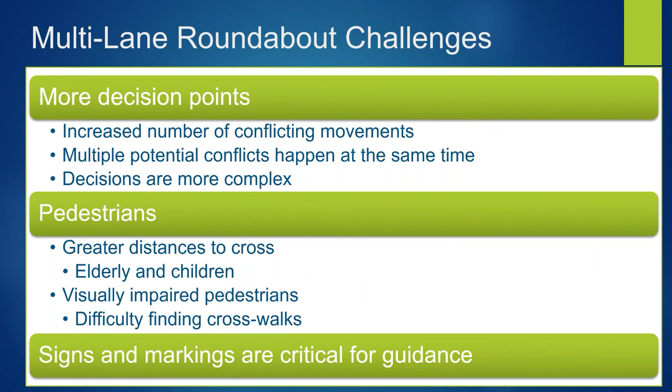Sometimes they have trouble finding the crosswalks because now it's not a straightforward 90-degree intersection. So the signs and markings are critical for making sure everyone in that system knows how to operate it.

Now, one of the common mistakes here is that we have a multi-lane intersection or roundabout, and we have both lanes that are marked to allow a straight through. So the red arrow that is moving on out of the circle could happen at the same time a car is entering the roundabout, and those two have a conflict point. So it's important for the ones entering the roundabout to understand that they are yielding not just to the outer lane of traffic, but also the inner lane of traffic. And that can be a difficult message to communicate.

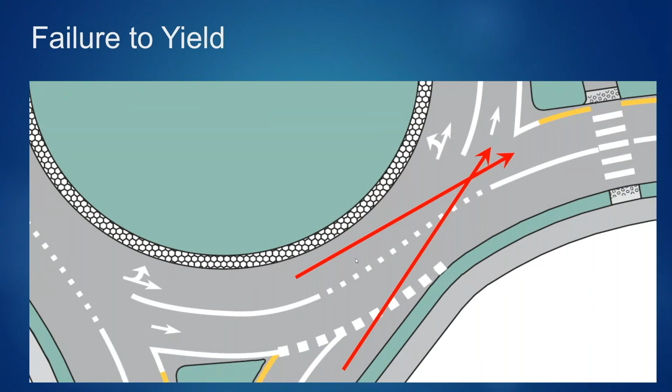Another situation where a conflict point can be created is here where we have the wrong lane usage. So in this case, the vehicle in the outer lane was supposed to exit. And they had a straight through, which meant go on through and exit the circle. But it looks like their lane continues. So if they change their mind and think, oh, nope, I need to go around to one more street, so they stay in, and at the same time the inside lane vehicle decides to exit, then we have a conflict point. So the correct signage is very important to put information here. Do we have both lanes able to exit? Do we have only the inner lane able to exit, go on around, and this outer lane is a right turn only? So think about those traffic patterns and where you want people to be able to go, and then make sure that that is communicated.

All right, in terms of our successes, changing from a two-way stop intersection to a roundabout, fatal and injury crashes here in the US overall dropped 82%. All crashes dropped 44%. Changing from a signalized intersection dropped fatal and injury crashes almost 80% and all crashes almost 50%. So pretty close on those numbers. And that is very encouraging.

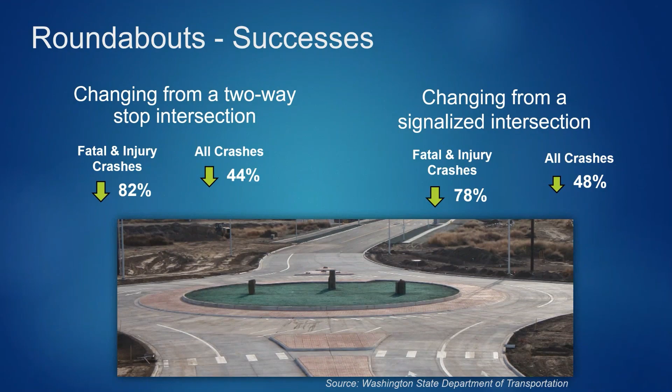The cost of roundabouts, they're not cheap. I won't say it's a low cost measure that you can use, but if you're comparing that to the cost of creating a signalized intersection, don't forget the maintenance that's involved with that traffic signal maintenance. Really, if you have a single lane intersection, it's about the same. The multi-lane, though, is going to be more expensive, mainly because of the right of way. You need good lighting, so you will have some features there that have to be maintained. And usually cities like to make that area a little bit more decorative. If you have bushes and flowers and such in the middle of the circle, don't forget to include the cost of maintenance for that landscaping.

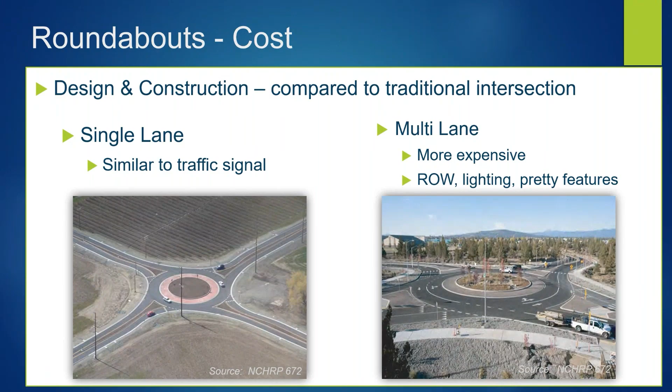Now, in terms of implementing roundabouts, know your users. Is this the first roundabout in the area? This is what I was saying earlier. Start with a single lane. Make sure that your drivers get a little bit of experience with that. Hold some public interest meetings. Let stakeholders ask the questions that they have, and then figure out, once your community is more comfortable with that, then start looking at policies.

And a lot of communities are going to a roundabout first type of policy, that we're going to design a roundabout unless there's a convincing reason that that won't work. And it is a cost saving measure in the long term with regard to signal maintenance, and then also just the safety benefits. So look at all your alternatives, consider the geometrics, the capacity, feasibility, how will you maintain traffic during construction, and all of those kinds of things. But definitely roundabouts, there are certainly concerns, especially from the public, but they have proven to do a lot of good in a lot of situations.

All right, any questions on that? All right, looks like we do not have any questions at this moment.

All right, well, I'm going to wrap up with a section on pedestrians and just show you a few things here that we can do or consider for maintaining and improving the safety and visibility of pedestrians.

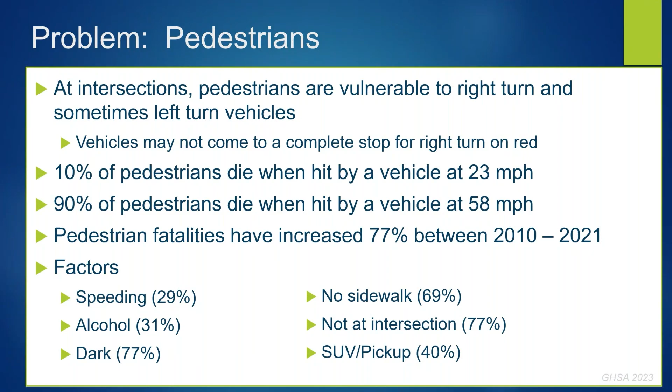And if you are driving, you're at an intersection, you're trying to manage your decision process, and you're really focusing on the other vehicles because you don't want to run into them. And sometimes, especially if we're in an area that doesn't have a whole lot of pedestrians, we forget to look for them. And so anything we can do to highlight the presence of a pedestrian or separate them completely from traffic, but somehow decrease the exposure of that pedestrian, give them a little bit of protection, is going to help.

And then if there is a conflict point, the slower the vehicle is moving, the better off they are. So, of course, consider the most vulnerable of those users, which would be the elderly and children. Now, one thing we can do is provide a median. We have to have enough right-of-way to do this, of course, but this is an area between the opposing lanes of traffic. And it's kind of like that splitter island on the roundabout.

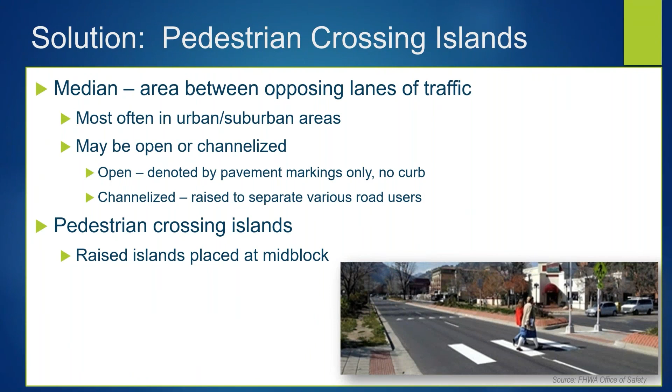If we can give pedestrians one direction of traffic to worry about at a time, get them halfway across the roadway, and then provide a safe space there in the median, then they can focus on the other direction of traffic to continue crossing to the other side of the road. So those crossing islands can be raised, not necessarily, don't have to be, but they could be at mid-block, which keeps them away from the intersection. Sometimes that's helpful. But a lot of successes are here.

Make sure our pedestrian crosswalks are very visible, good paint, all that kind of thing. If it's dusk or dark and the pedestrian's wearing dark clothes and they're crossing not at an intersection, they just sort of wander out into the street, it is very hard to see that and adjust in time. So if they aren't paying attention to keep themselves safe, it makes it very difficult for a vehicle that's moving much faster than them to catch on to that.

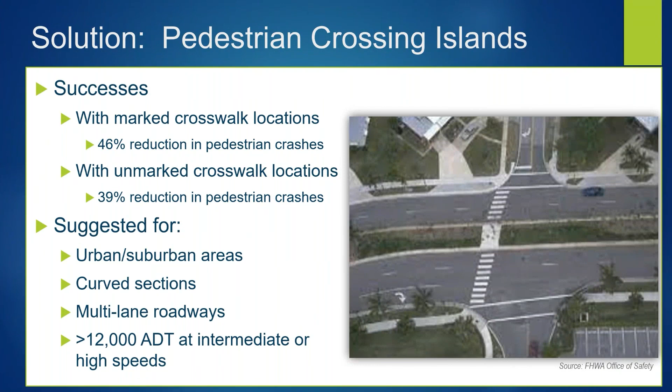So these crossing islands are good for urban and suburban areas, curved sections where maybe vehicles have less visibility of approaching a pedestrian. Those multi-lane roadways, sometimes in multi-lane, there's a vehicle blocking your view. That makes it difficult, or a vehicle might block your vehicle from the view of the pedestrian. There are lots of variations for these mid-block type crossings.

If you have lots of pedestrians and need more storage, you can use this dogleg shape where that median is almost all pedestrian storage. So by making it kind of zigzag before you cross the other leg of that roadway, that gives a lot more storage space so that more pedestrians can be safe inside those bollards that are providing some level of protection.

And so it starts off by flashing yellow. And what does that convey to the driver? Same thing any other yellow light does. Caution, slow down, it's about to turn red. So it goes from a flashing yellow to a steady yellow, and then it moves to a steady red. When it's red, that's when the pedestrian gets the signal that they are allowed to cross. And then after a certain time period, the 2 red beacons start to flash back and forth. And at that point, if it's clear, then vehicles can continue on.

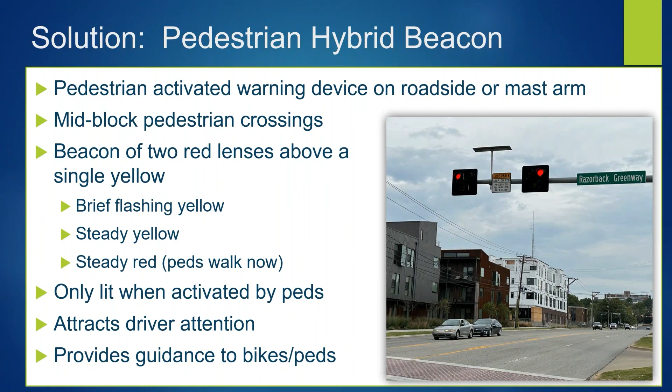This only flashes or activates when the pedestrian signals, so there will be a button for them to push, and that's the only time it works. So if there are no pedestrians, then there's no interaction with drivers. They can continue on like they normally would. But it gives attention to drivers, but it really gives a lot of guidance to the bikes and the pedestrians to tell them when they should or shouldn't go.

Pedestrian hybrid beacons, and a lot of times these are called HAWKs. That's not necessarily an intuitive acronym, but this is something that is recommended to use only in conjunction with a marked crosswalk. It could be very valuable if you have gaps in traffic where it's really hard for a pedestrian to have enough time to cross, especially on multi-lane roads. If it's intermediate or high speed, sometimes the pedestrian can get caught out there unawares.

And if you have a lot of delay where pedestrians are having to wait a lot. You can include some public education efforts, but signage is typically the best way to go so that anyone who gets to that point, if that HAWK is activated, there's no question what they should do. The colors are essentially the same as a regular stoplight, so they should know. But good successes with this: pedestrian crashes with the HAWK in place are down about 70%. All crashes are down about 30%.

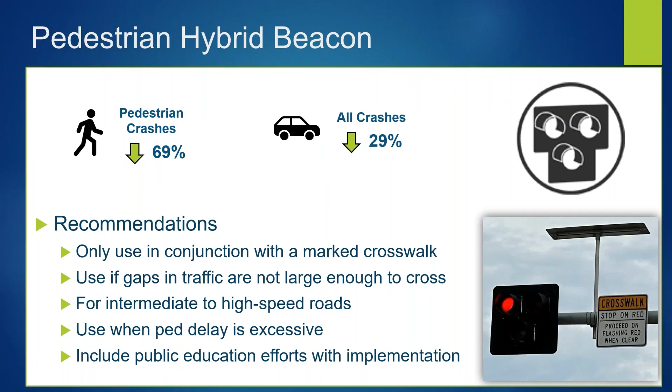If you have a lot of traffic or the speed is very high, sometimes that can surprise folks coming around a corner and they don't stop in time. So if you have a lot of rear-end accidents on those 4-lane roadways, 2 lanes each direction with lots of driveway access, this might be a very good solution.

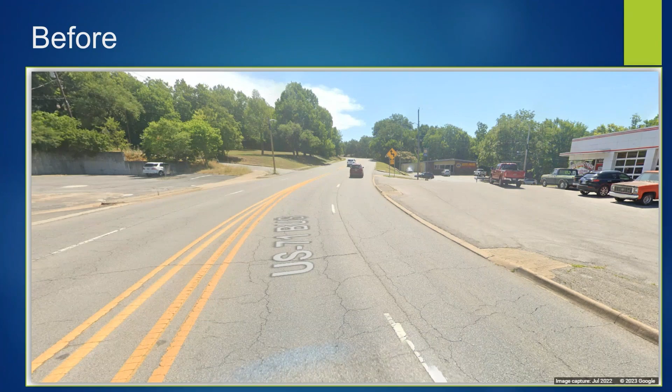Here's another example. This is one done locally. There are 4 lanes here and lots of curves going up a hill, and it's 2 S curves, one right after the other. So compound curvature and lots of places to turn left into driveways, streets, and businesses. And this was converted from that 4-lane into 3-lane. So we've got 1 lane each direction, a 2-way center left turn lane, and then some bike lanes over here on the edge, and then some areas that are really to be unused. But it definitely separates the vehicle traffic from the pedestrian traffic. So that's a definite benefit.

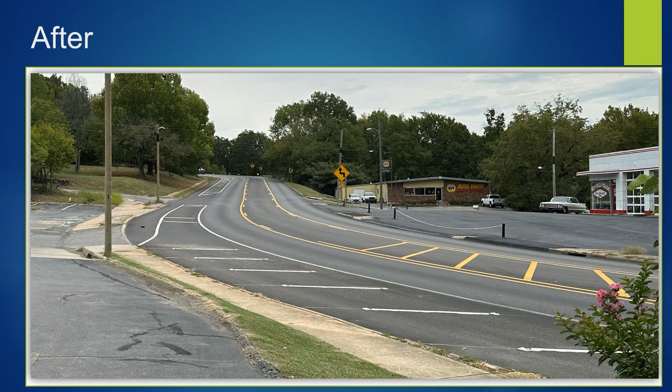Now, a road diet does reduce your capacity some, so you need to do a study with traffic counts and make sure that it's going to work. But there are lots of advantages, not just for pedestrians, but for the multiple threat crash. Say one vehicle stops for a pedestrian, and the car in the next lane doesn't. That's an issue. If you look just at vehicles, imagine 2 lanes each direction. You're in the left lane waiting to turn, and there are 2 cars coming toward you, but because one car is larger in the near lane and the other is kind of hidden by it, you may say, oh, this car is gone, as soon as they get past, I'm going to make that left turn. You hit the gas and didn't realize there was another car there. So visibility is a big issue on those types of roadways, and a road diet definitely helps.

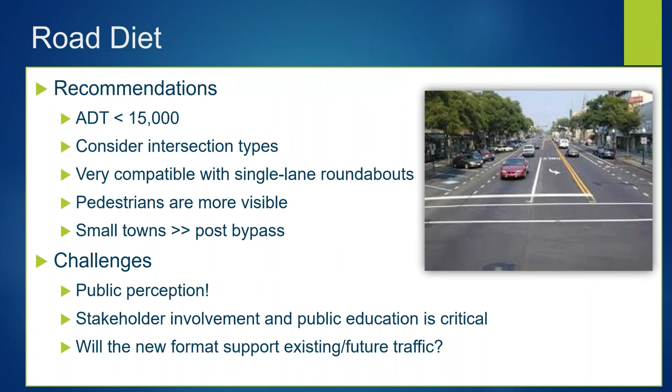So recommendations are for under 15,000 vehicles per day. Of course, there are some challenges. The public is not always happy with it. But again, public education is critical, and if it's designed right and performs right, that typically handles the questions. And speaking of questions, that is about all I have. So, any other questions that have come through?

No, I believe that is everything. Well, right, we did have, I know we're short on time, one just came through that I'll read quick: what are some pavement marking or alternative solutions one can use when a class 2 bike lane is being implemented on a 25-mile-per-hour rural Main Street highway adjacent to head-in parking when reverse parking is not favorable?

I'm going to have to think about that one for a second. I'll tell you what, I will respond by email if that's all right, since we are out of time. I don't want to keep everybody any longer than we have to. But just make sure we have contact information there, and I will answer that question.